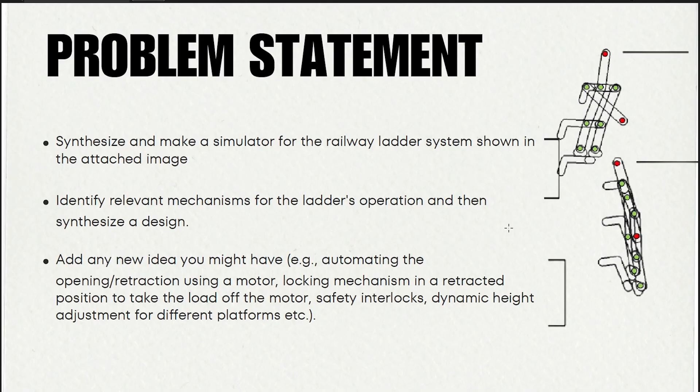And then create our own synthesized mechanism that replicates this motion and demonstrate it through SolidWorks and MATLAB. We are going to use double rocker mechanism in this project. So our next member Harsh Anand is going to carry on this project and to explain double rocker mechanism through MATLAB.

Hi, this is Harsh Anand, a third year UG from the mechanical department. I will be explaining the core mechanism of our railway ladder project. The entire system is built from a series of 4R mechanisms based on our analysis using the Grashof criteria, which for a double rocker holds true when the sum of the longest and the shortest links is greater than the sum of the other two links. We classify this linkage as a double rocker mechanism.

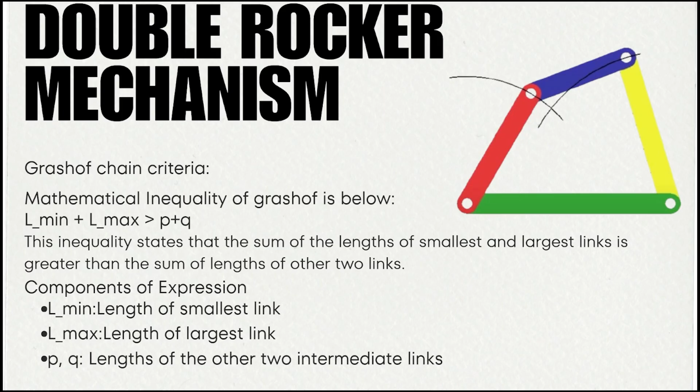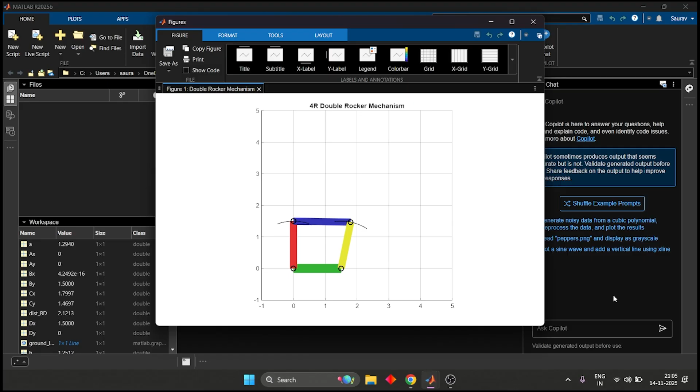We validated this mechanism using a two-part simulation approach. First, to prove this, we have created a simulation in MATLAB. This allowed us to model the kinematic equations, plot the exact motion of each link, and confirm the double rocker behavior was mathematically correct. Second, once the kinematics were proven in MATLAB, we built the 3D model in SolidWorks to validate the physical design. Now my teammate Saurav will explain to you about the simulation of the model.

Hi everyone, my name is Saurav Shekhar, a third year undergraduate student of the Department of Mechanical Engineering. I handle the simulation for our project. Our project focuses entirely on validating this design concept using digital simulation. Our primary objective for this simulation was kinematic validation. This answers the most fundamental question: does it move correctly?

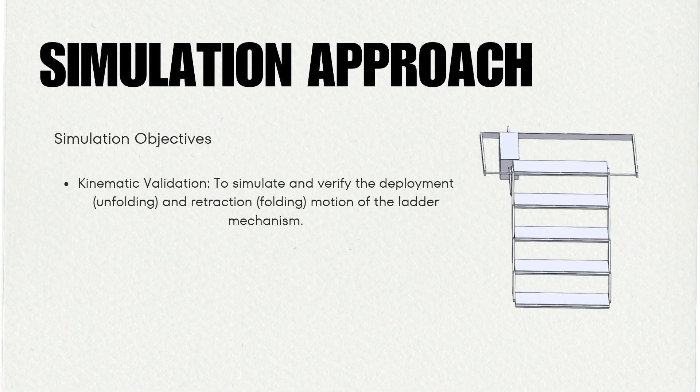We needed to simulate and verify the complete deployment and retraction folding motion of the ladder mechanism. Our goal was to prove the geometry and linkages work as intended. With that goal in our mind, our first step was building the virtual model in SolidWorks to behave just like a real world object. We assembled all the components.

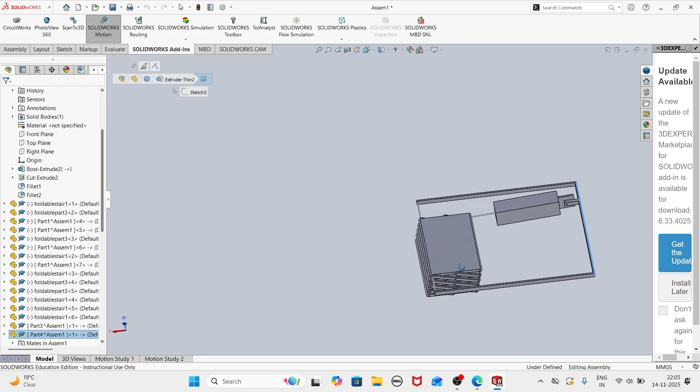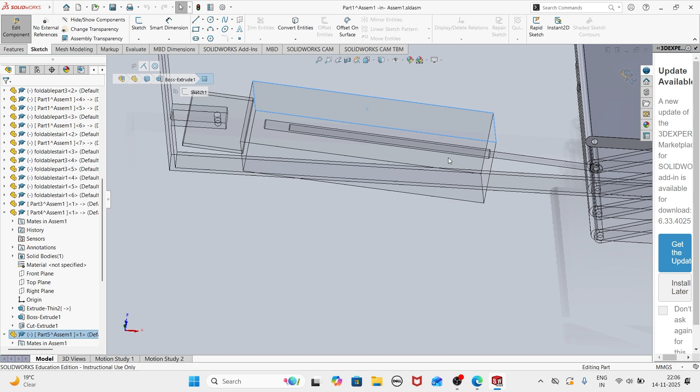Here the components are: this is the plate for the ladder bridge where the passenger will stand. Other components are, this is the actuator part, this is the body for the motor, these are the links.

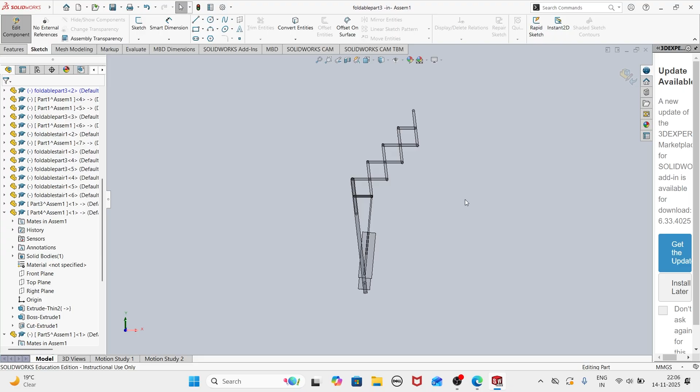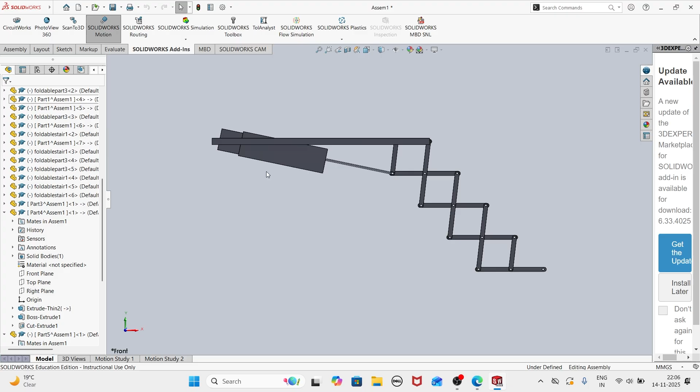For all the pivot points, we applied concentric mates to allow for correct rotation. Next, we used coincident mates to connect the linkages, ensuring they move together as one constrained motion. Finally, we grounded the base link part attached to the train. This created a fixed reference for all the motion. This is the fixed link which will be connected to the train component and act as our ground base. This will move like this.

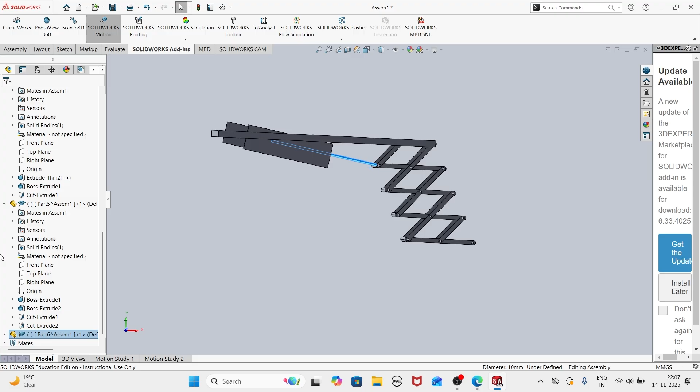Now we have the model built. We are ready to test its motion using the motion study feature of SolidWorks. To drive this mechanism, we applied an actuator motor to the primary shaft. This part is the primary shaft. We have applied a motor in this actuator to move it. We will use motion study to see the animation. I set the speed to 0.5x to see it correctly.

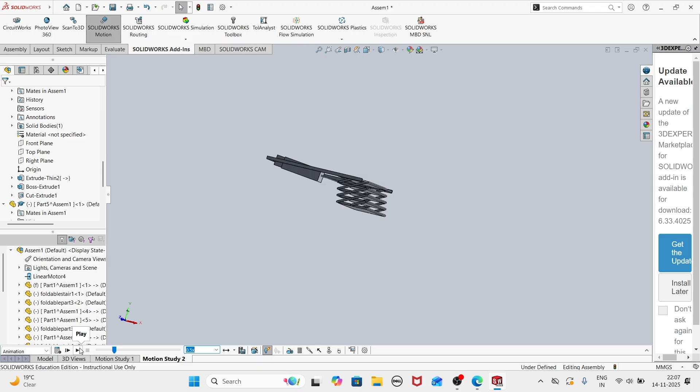We will now run the animation for the path verification, visually confirming the ladder deployed smoothly from its stowed to extended position. As you can see, as the actuator moves, the ladder opens up.

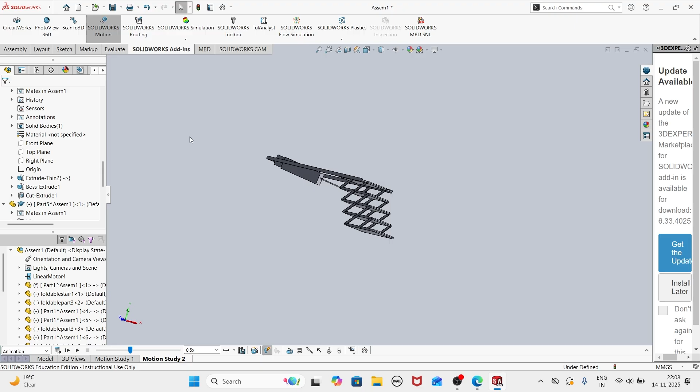In summary, our simulation process successfully built a constrained virtual model and used it to validate the ladder's complete range of motion. We have confirmed how the ladder moves and verified critically that it does so correctly, with no geometric interference. This kinematic validation is the essential first step proving the fundamental concept of the mechanism is sound. Now I will pass the floor to my friend Raghav, who will enlighten you about the innovation that can be added to this model. Thank you.

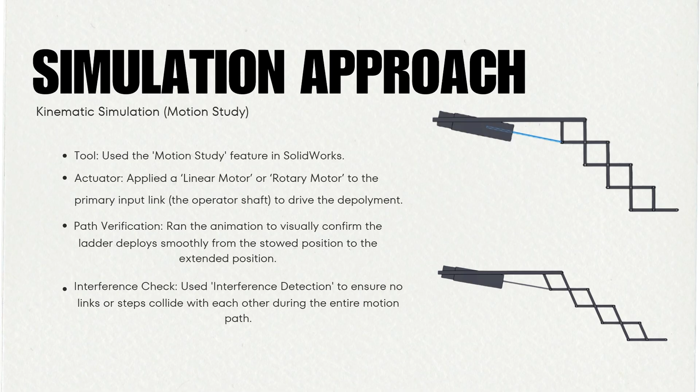Moving forward, we'd like to discuss several possible innovations that could further enhance our mechanism. Each idea is designed to tackle real-world challenges faced in railway operations and to make the passenger experience safer and more accessible. Over the next few slides, we'll go into the details about these possibilities, their motivation, their operation, and their potential impacts.

Possible innovation number one, we could have hard die material end positions with piezo sensors. The first possibility centers around precise control of the mechanism's movement. In railway environments, reliable operation is critical. Errors in stopping positions can mean increased wear, delayed operations, or safety hazards.

To address this, we could install hard die material at the extreme ends, both fully open and fully closed positions, acting as durable physical stops. Piezo sensors, known for their sensitivity to pressure and impact, would be placed on these stops. When the mechanism makes contact, the sensor detects the impact and signals the controller to halt the motor instantly.

This approach could serve several benefits. Firstly, it provides a failsafe to prevent over travel if the motor does not stop in time, reducing the risk of mechanical damage. Secondly, it gives real-time feedback that helps reduce the load and stress on the motor, potentially extending its service life.

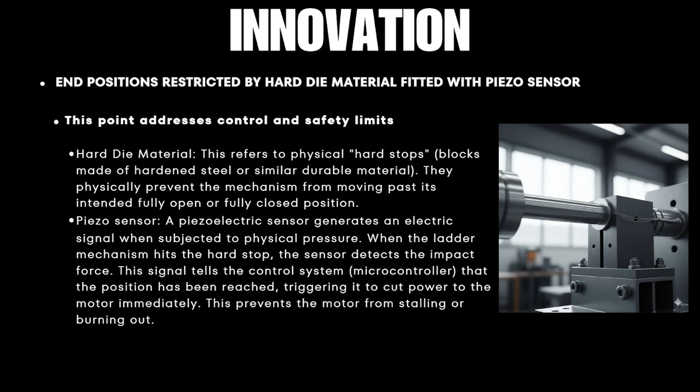Thirdly, with constant monitoring by the sensors, we can maintain a high level of safety, ensuring the ladder is in the correct position before passengers use it. Such a solution could reduce maintenance requirements and operational risks, especially in busy or unattended stations.

Possible innovation number two, we could have a shaft key or radial gear locking mechanism. A second innovation addresses a common limitation with electric actuators, holding heavy loads over time. Typically, motors are great for motion, but inefficient for supporting static weight. Keeping a motor energized just to hold a position can cause unnecessary energy consumption and heat buildup.

To overcome this, we could integrate a mechanical locking system. One method is the use of a shaft key, a small removable piece that slips into place between the shaft and its housing to lock rotation. Another option is a radial gear lock, where part of the gear system physically engages to block movement when not in active use.

With this mechanism, once the ladder is fully deployed, the motor can disengage and the lock would take over, bearing the static load efficiently, even with passengers on the steps. This prevents the motor from working continually to support the load, reducing energy costs and increasing the longevity of the motor. For maintenance crews and railway operators, such a lock means less frequent servicing and greater system reliability.

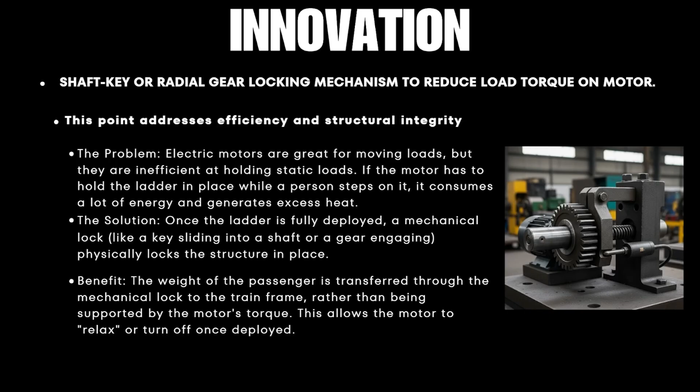It's also an added safety feature. Mechanical locks are less prone to failure than electrical holding systems, especially under unexpected loads or power interruptions. Implementing this innovation could help railways run more efficiently and safely on high traffic routes.

Possible innovation number three, we could have proximity sensors and linear actuation for platform positioning. Platforms in India and around the world are rarely uniform in height. Trains might stop at stations where platforms vary by several centimeters or more.

To guarantee optimal passenger comfort and safety, we consider the integration of proximity sensors like ultrasonic or infrared systems beneath the ladder. These sensors would continuously measure the gap between the lowest step and the platform as the train pulls in. Based on this sensor data, a linear actuator can then extend or retract the ladder support arm to match the exact platform height.

This adaptation would provide several advantages. Boarding and exiting the train becomes smoother for all passengers, especially the elderly and those carrying luggage. For operators, there's less risk of steps being too high or low, preventing accidents. Moreover, automation here minimizes human intervention.

Operators simply initiate the ladder's deployment and the system does the rest, using real-time feedback to deliver precise adjustment every time. Such a feature could make the system suitable for deployment on a wide range of rolling stock and platform configurations, and could even be expanded in the future with additional sensors for crowd monitoring or other platform features.

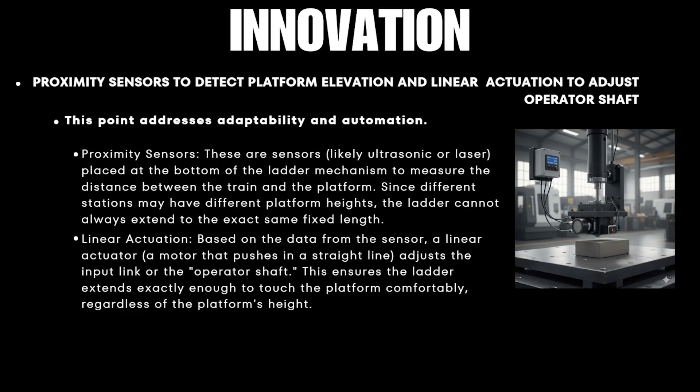Possible innovation number four, we could have an inclined plane mechanism for wheelchair access. The final innovation we want to highlight deals with inclusivity. Today, accessibility is a legal and ethical requirement for public transport. Many train ladders don't accommodate wheelchair bound or mobility impaired passengers, creating a barrier to travel.

Our possible solution uses an adaptable mechanism. Using carefully designed linkages, these steps can be reconfigured to form a continuous inclined plane, a ramp. With a simple actuator movement, the ladder transforms from a staircase to a smooth ramp. This would mean that wheelchair users or people with strollers and heavy luggage could board independently, without station staff needing to deploy separate equipment or ramps.

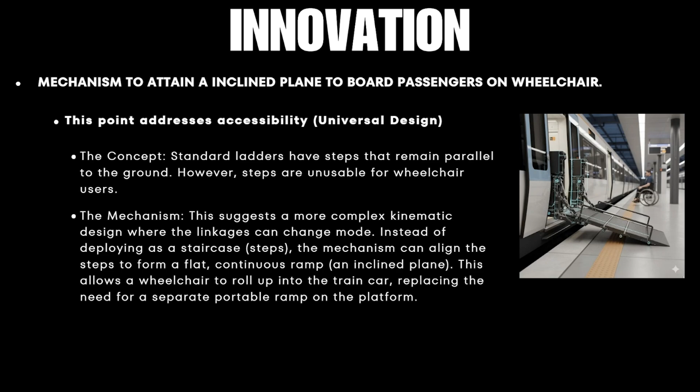These benefits extend beyond legal compliance. Such a mechanism puts all passengers on equal footing, fostering independence and dignity for everyone. Additionally, this innovation demonstrates our commitment to universal design, making public transport accessible and comfortable for all users. With further refinement, the mechanism could be adapted to accommodate different platform widths or gradients, making it a versatile solution for the future of urban and long distance railways.